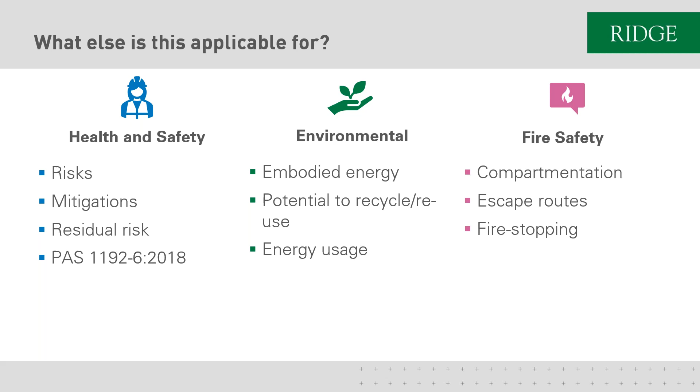And we're going to be talking about fire safety, and chiefly among that is fire stopping in this presentation. So a bit of an overview. The stuff running down the left-hand side of the screen are things that don't happen within Solibri and are probably prerequisites to what you'd want from the process. A good EIR is paramount. The EIR is a resource that says what information is required for somebody to do their job.

Most commonly these come from a client, but it definitely doesn't have to be from a client. When we're working on a project where we've got no involvement other than this fire stopping check, we have a list of things that we need from the models, and that's included within our exchange information requirements. We need to move away from unstructured data. Things like specifications, documents, anything in a long PDF might have some great content in there, but it's really difficult to check that and to actually use it.

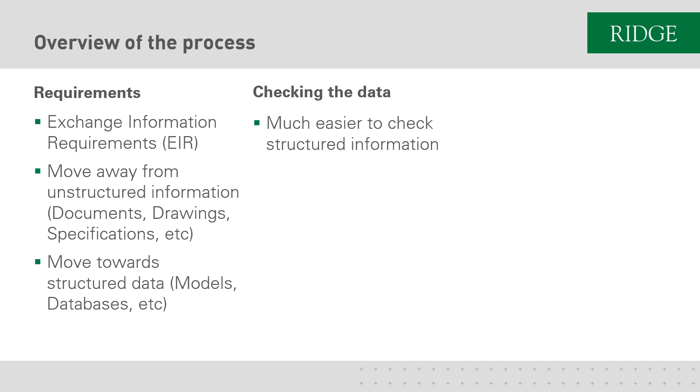I think as an industry, we're very focused on structuring information how we, the author, want to produce it, rather than thinking about how the end user can use it, and even how a machine can interpret it as well to actually use some of the data. And within Solibri, we're essentially checking this data through the rules that I'll talk about, and then Simon will give a live demo with. And we also look at it visually through classifications, and a key one for clients is these takeoffs, where you can schedule out all of the fire stops within the model for other purposes.

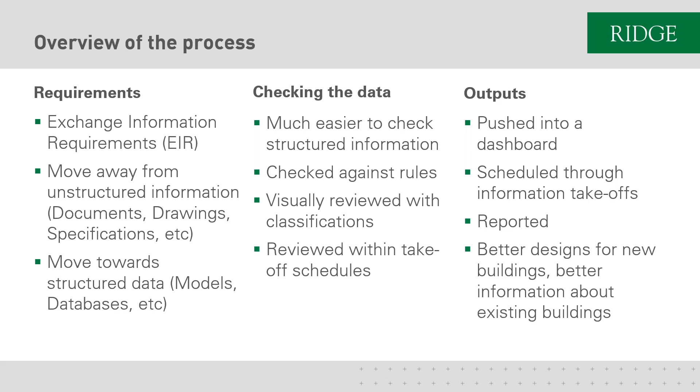And then we can produce outputs through dashboards and reports, and these are key to affect decision making of what needs to change. We can do everything on the right hand side with Solibri. So let's talk about fire stopping a little bit.

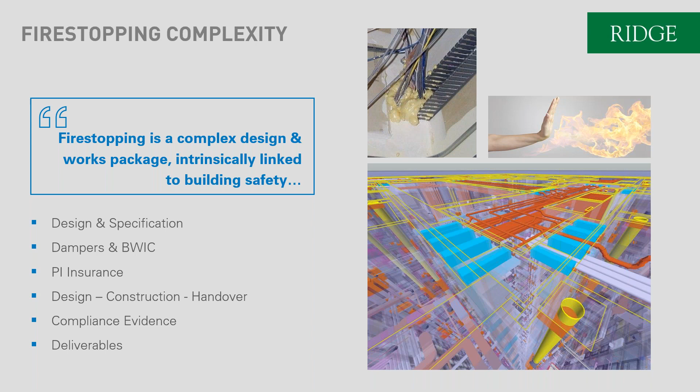It's typically something which is in a scope gap on a lot of projects. It's a hot potato that nobody wants to touch, and it's something that we see, BIM or not, doesn't happen particularly well through the design, let alone when it gets to site and the rest of the lark. So that's the key reason of why we do these checks within there. That's that scope gap. So going to go through a bit of terminology.

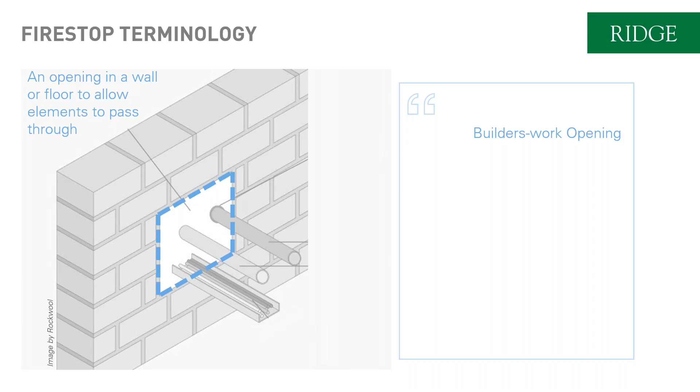And then within it, we can put a fire stop, so this can fill the whole opening, or it might be sleeved around the individual elements, or sprayed, or there's other ways of doing it. But it's basically a product that you'd put in there to stop the spread from one room to another, hence the name fire stop. As a wall will be made to a particular minute fire rating, and then somebody might go punch a hole through that wall to fit their service in. So product needs to go around it, otherwise it can cause issues.

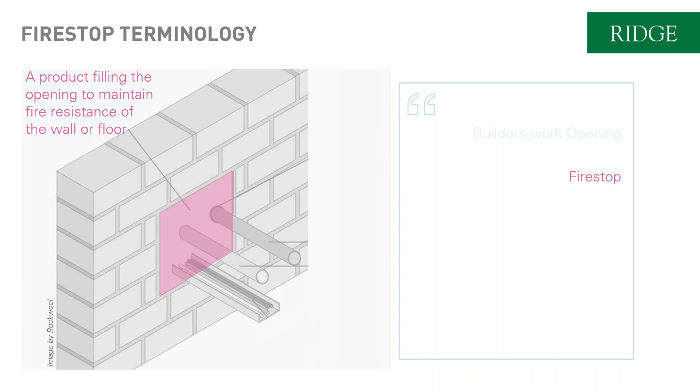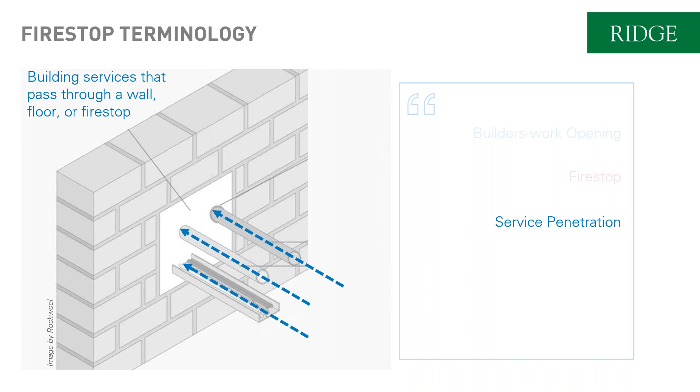When we talk about service penetration, these are just things going through the opening or the fire stop. So we've got some cable trays and some pipes there, could also be ducts and other things. And then service spacing is the distance between the pipes or the services, and then the aperture spacing is the distance between the service and the edge of the opening.

So, digital approach. We don't really see this as a one-time search. It's not like, oh, get the models, identify all the issues, it's all fixed. It's an iterative process, much like coordination checks are anyway. It's kind of a broadening of the definition to include fire stopping within that. So it'd be about checking, providing feedback, seeing that some of the issues are mitigated within the models, repeating it, checking on site, all of this sort of stuff is important. It's not a push button thing that solves things.

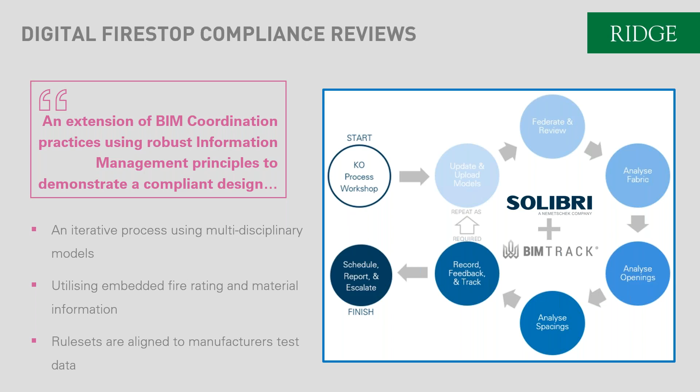And we're using Solibri to do these checks, and BIMtrack, although you could use a different BCF platform than BIMtrack, but I think Solibri is key in that. Who's this relevant for? I'm tight on time, so I'm going to summarize this slide and say everyone. As a contractor or a designer, it's going to mitigate risk by doing it properly. And as an occupant, we all benefit from safer buildings for obvious reasons.

What data is needed? So the prerequisites to what might be required within your information model before you can do the checks that Simon will show. So we need all elements to be assigned an IFC class, and this just means that when you click on something within a model, it's going to know whether it's a door or a window or a pipe or a cable tray, and IFC is the standard and schema that we'd use to do that.

And most importantly, in IFC, you've got different enumerations, so that instead of it just being a cable carrier, you can tell it whether it's a piece of trunking, or it's the cable tray, or it's a cable ladder, as some different manufacturer specifications do deal with those differently.

We also need material data, so whether it's a copper pipe, a plastic pipe, or a steel pipe will change how the rules should work and how manufacturers need the services spaced. We need fire rating information within the walls and floors and doors as well. And the key one here is that a lot of the time this data exists already, it's just not within the structure that we need it to be.

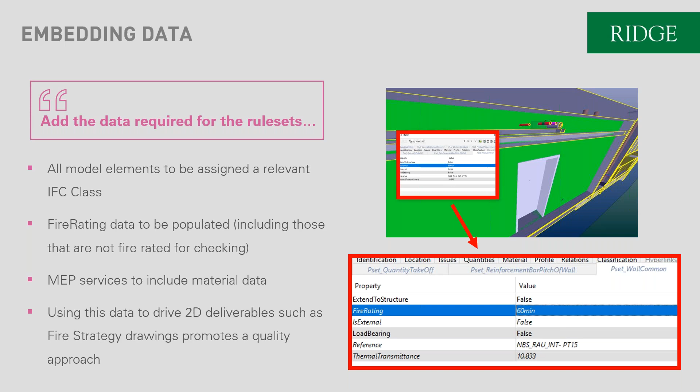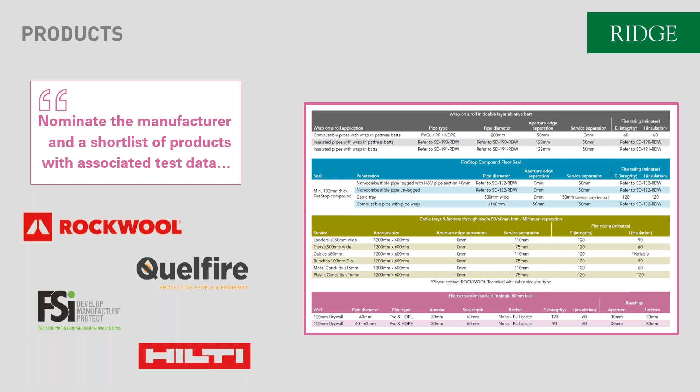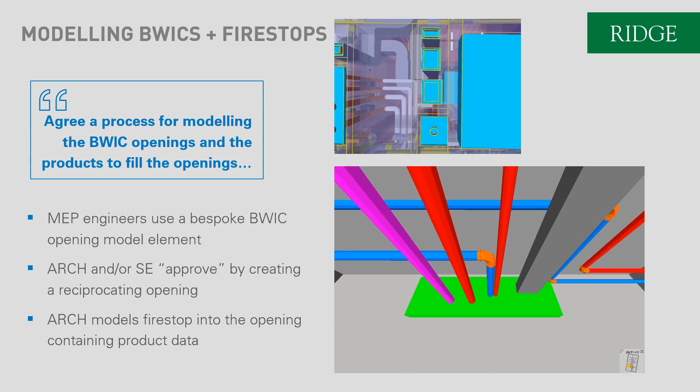We need builders works and Firestops modeled. We've been doing it with these really basic boxes. You could go more detailed, but even just this box will give you a whole range of different checking options. You can do it without the box that you've got here in green and those teal ones on the top, but really you're just limited to service spacings within fire rated walls and floors. You're not looking at distances between apertures and controlling the size of openings. So you do need those modeled in, but we see those quite typically on projects anyway.

They could be put into the COBie spreadsheet, they could be put on a maintenance list, although they don't degrade over time as much as some other products, although everything does degrade over time. It's more about checking things to make sure that no changes have been made, no contractor's been there and destroyed some good design work. They're definitely things that need to be on a robust maintenance schedule.

And linking to some of the things that David said, if you have a list of fire stops in there, you can use that as a pro forma all the way through to check that it's been installed properly, to then photograph that on an iPad to see if it's the same as in the design model, to then maintenance, even taking a picture of that every year. It might be overkill for some of them, but there's nothing more important than checking this sort of stuff. Those sort of outputs. And that's the end of my presentation.

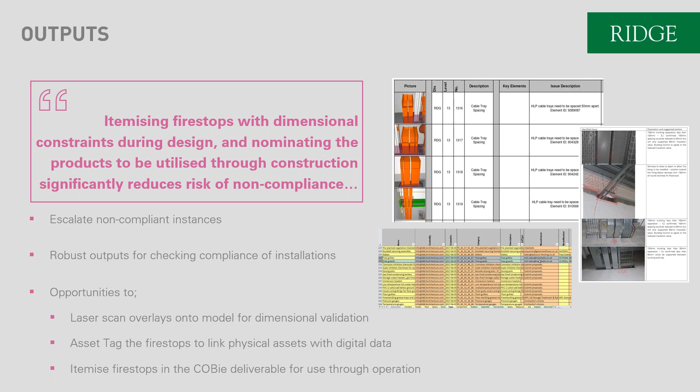I'll hand you over to Simon. Thanks, Alex, and apologies for not giving you a proper introduction there. So this is a BIM manager at Ridge and Partners, one of our customers, and has done a couple of presentations for us before. And actually what he hasn't told you there is that the work they were doing with the fire stopping, they've actually won a number of awards for.

So it came to our attention, just the work they were doing with fire stopping, and that leads us into the next presentation from Simon, where we've tried to take some of the work they've done and automate it a little bit more.

Just before we move to Simon, now I know how to use the polls. I will share them and run the second poll. So first of all, just sharing the first question we asked: at what stage of the project do you do your fire safety coordination and check? So that's just showing you the results from that.

Okay, and then if I just move to the next poll, who checks the digital model within your organization for compliance? I'll just launch that one. And if you can answer that, we'll then move on to the final presentation, which will actually be a live demonstration. So just let that run a little bit longer.

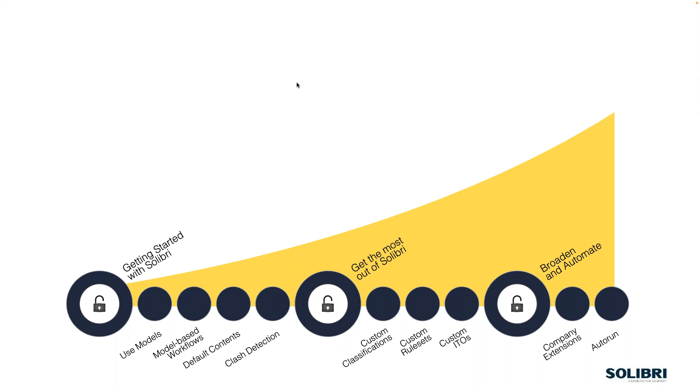Users then can move into improving that functionality even further with creating ways to deploy those new rule sets, and also to automate the whole process of running those at any part of the day really. Now, what we have done is we've created a software development platform, and this is really key to the development that we're talking about today. It provides us with an application programming interface, which enables us to create new rule templates within Solibri. So use the wealth of over 20 years of functionality within the software and give us the ability to build on that and generate our own rules, which are more specific for the industry rather than more generic out of the box. So that's what we're currently looking at here, a very specific use of the technology.

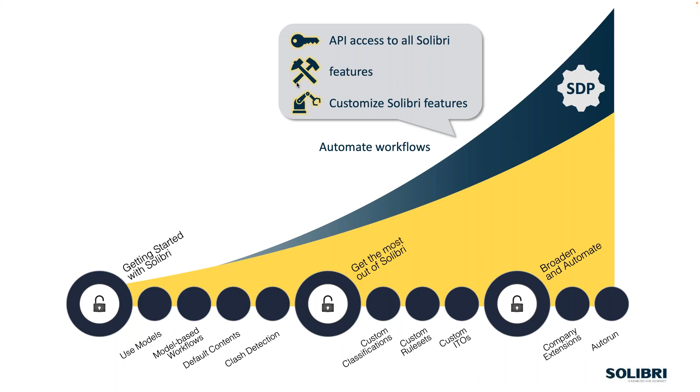So we started off with looking at the fire stopping guidance for the Association for Specialist Fire Protection. And what we're looking at is golden rule 3, which is all about the identification of service intersections with compartmentation walls and floors and what their key spatial requirements are for those services. And Alex gave you a few really nice images from Rockwool which give you the kind of dimensions and those types of things that are actually required within the model itself.

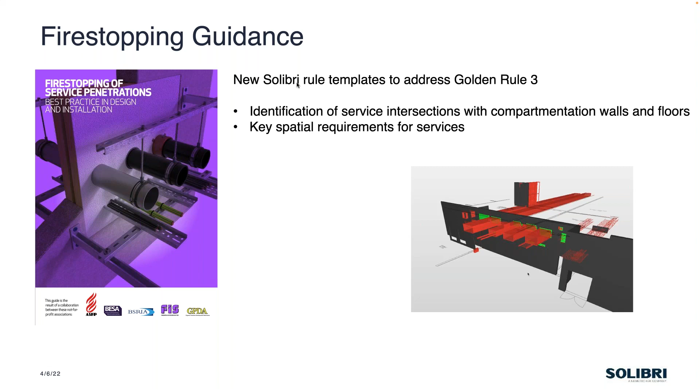So this is what we've done to date, and once we're happy with this data and it's at a point where it's robust and it's been tested fully, which has been happening as we move along with this development, then this will be released to our user base.

So the first part is we have a fire stopping identity rule, and the identity rule enables us to identify all the service penetrations going through any compartmentation walls or floors. Now, we've done quite a lot of work here where objects may be present, panelized systems where voids are not present. So basically, we will find the intersections between physical components like walls and services. We'll also find the intersections between voids, say openings, and where those voids aren't present, so it isn't a physical clash, it will still find that data.

And then what we can do with this fire stopping identity rule is check how many of those services have been addressed by a BWIC or a fire seal component, and we'll have a look at that in a second. Then we have the fire stopping distance rule, and the distance rule is really all about checking the physical dimensions related to the fire seal or the BWIC in this case here, so it can actually start off with the BWIC if you want to.

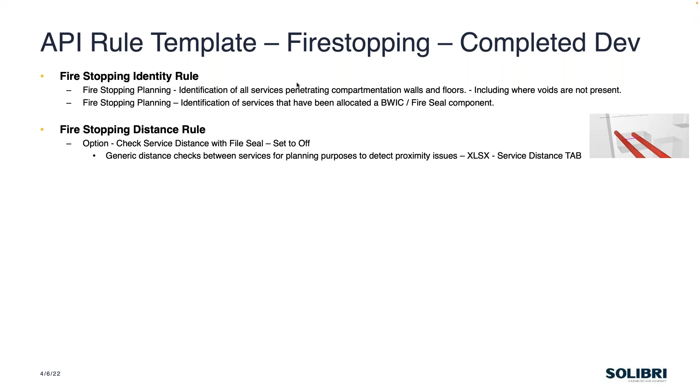But we have a setting in this rule, which is basically if we set it to off, then we can do some very early generic distance checks between services. It's driven by an Excel spreadsheet in the background, and that gives us the ability to give you some rules of thumb checks between those services to highlight problems that you might have before you get into planning of those items.

Then when we turn the option on within the same rule, we can then check the distances between those fire seals or the BWICs themselves. And again, that's driven by a fire seal distance tab. And you can see the image there is pointing out the distances between them. We can also then check between the fire seal edges and the surfaces to make sure they're meeting their requirements for those services and the instance of the fire seal itself.

We can check the allowed services within certain types of fire seals, so that we're not putting services in there that shouldn't be placed in those particular fire seals. And we can also make sure that we've not got any partial penetrations of those fire seals, so making sure that the services fully penetrate right through the middle of those components. And then we can check the services distance within the fire seal against the same service or different services. And again, we've got a tab in the spreadsheet that will do that as well.

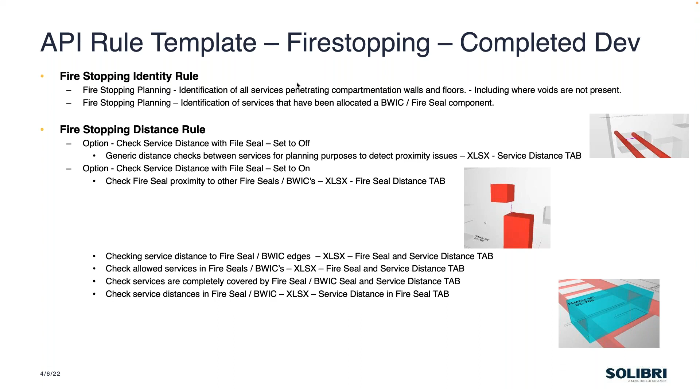On top of that, we have another rule which checks the dimensions of those fire seals in relationship to information that you might get from a manufacturer, just checking that the actual dimensions of them are compliant, and also that we're checking for the positions of those within the walls. We're checking here for things like drop head details, where certain instances of these seals can't be placed in certain conditions, and proximity to the edge of the walls, things like that, which we can actually configure as well. So quite a lot of work has gone on there in order to achieve those goals.

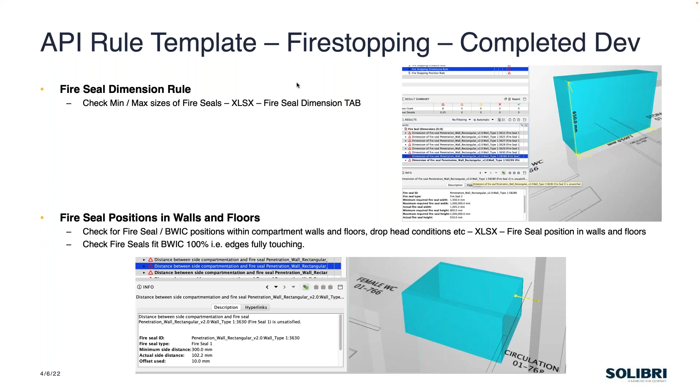We then can check within the same rule here that the fire seal fits the BWIC completely 100%, i.e. that there's no gaps between the builder's work hole and the actual fire seal itself. And you can see with all our reports there in the description part within the dialog box, we give good quality descriptions as far as why it's unsatisfied or failing and what the actual requirements would be as far as those distances.

We've got some remaining development here to do, which we're currently working on. We've got the service distance measurement adjustment, because we should be measuring between any fire stopping products, not just the services. So if we have sleeves that go around uPVC pipes, then it needs to measure to the seal dimensions. And also the accessibility of those.

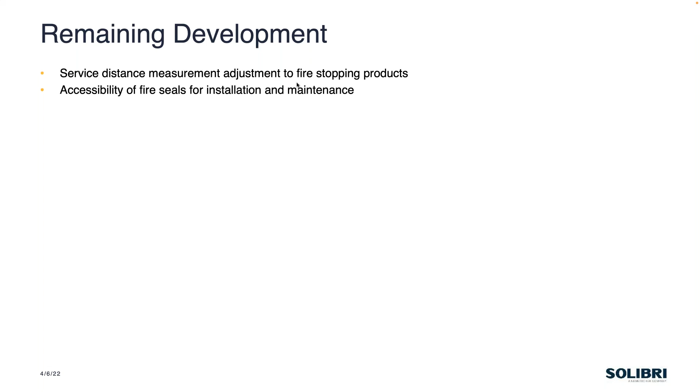So not only checking the locality of those BWICs or the fire seals within the wall itself, but also making sure that we can physically install those and maintain them correctly as the building matures.

We've also then checked the supporting construction, checking whether the installation is single or double-sided, and then comparing the manufacturer's requirements of that fire seal against the wall data or the supporting wall or floor construction. That involves the thicknesses of the floors, the type of construction, the acoustic rating, the fire rating, all those kind of properties required from it.

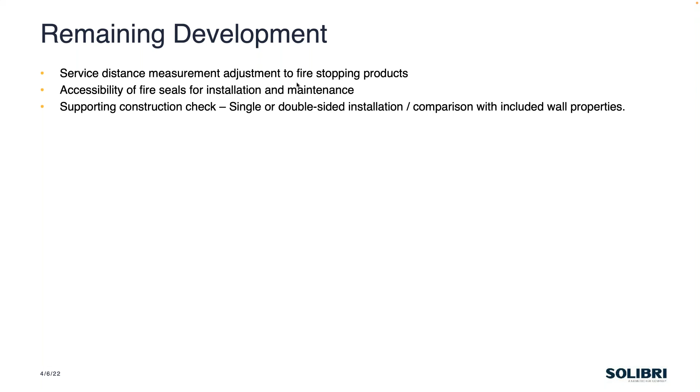We've had requirements already from customers that are looking at net gross areas for the materials for these services, as far as installation and optimization of materiality.

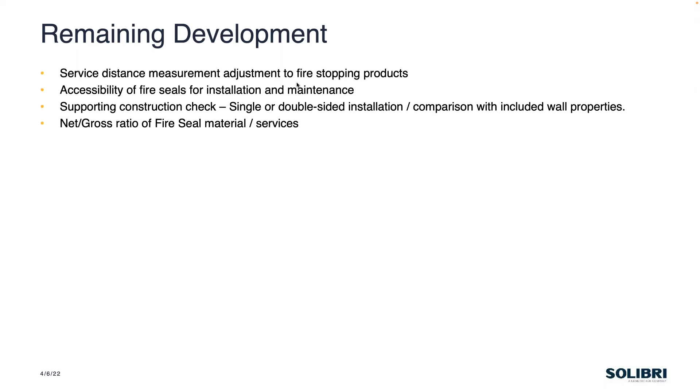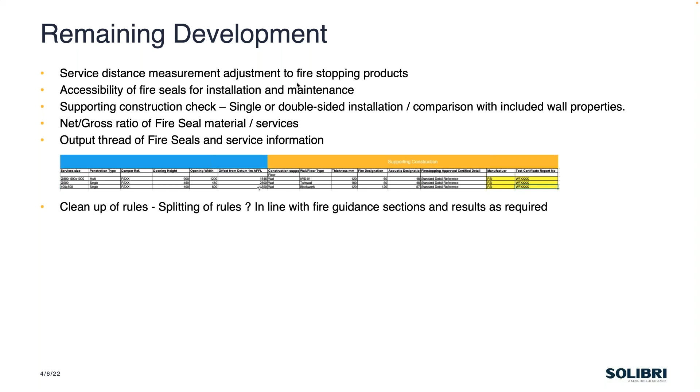And then finally, once we've done that, we will collect all this information and create an output thread for the fire seals and service information to help with that golden thread information within the model. And then we may do some cleaning up of the rules and how they're aligned and how it generates the data in the background once we're happy with the way they're all working.

So basically what we'll do is move over to the demonstration now. We'll come out of PowerPoint and go over to Solibri.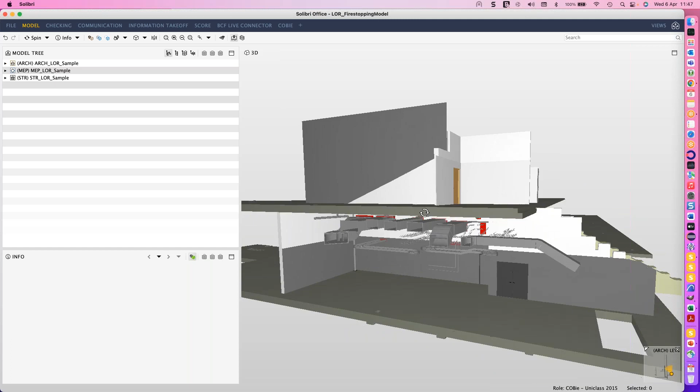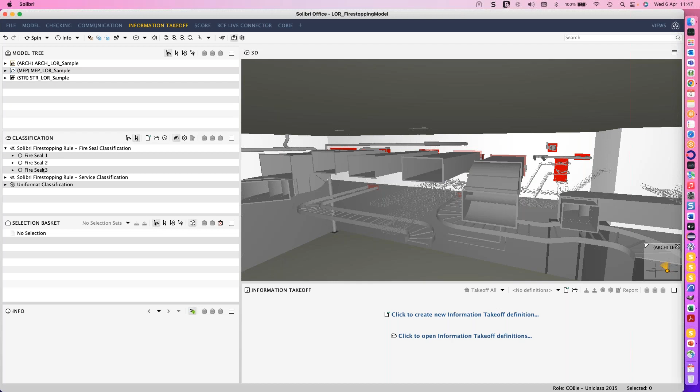So what we're looking at here is just a very simple model, which has a number of services in it. I'd like to point out that we have a couple of classifications. Solibri uses classifications to group elements, and to color code elements to create baskets of data. So in this case here, we wouldn't necessarily call these fire seals.

What we actually have is the seals in the model. They might be the IDs of the standard details from people like Rockwool or Hilti or anybody else, and that would give us an identification for the type of seal, not the instance, because that would be the ID.

And then we would have a grouping of different services. Again, it wouldn't be this low level—it would be broken down to maybe small, medium and large pipes, or UPVC pipes, copper pipes. It could be right down to the granularity of the exact sizes that might be needed to test against these seal conditions.

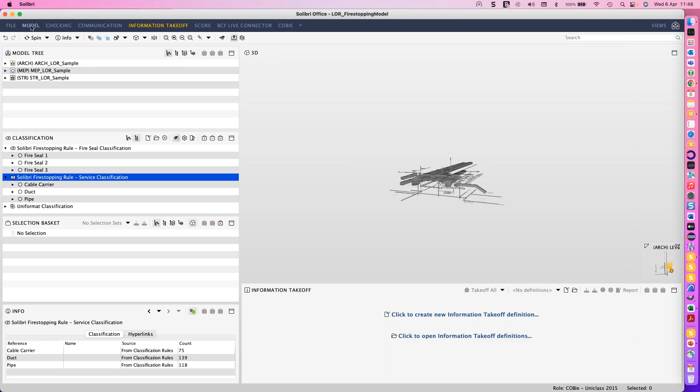So the idea here is that we're grouping and analyzing that data in order that we can drive it into the rules that we've currently got. Now, when we move over to the checking area here, we've got these rules that I've just gone through in the presentation. If we hit the check model button here, it runs through those checks.

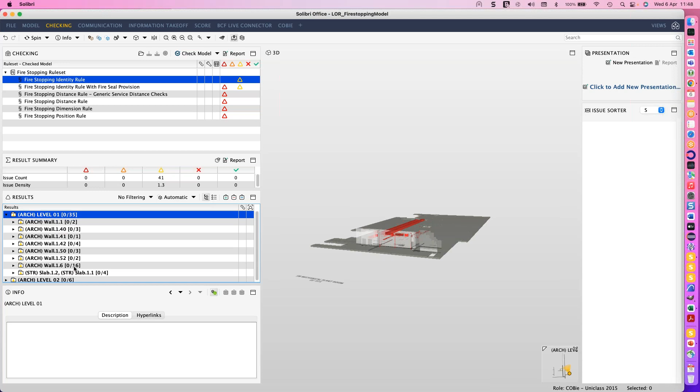The first thing is that, like we specified in the presentation, we check the fire stopping identity rule. Now, the identity rule here breaks down the number of walls where we have services going through those compartmentation walls. In this case, we'd have to identify which are compartmentation walls first, and floors, but each one is then treated.

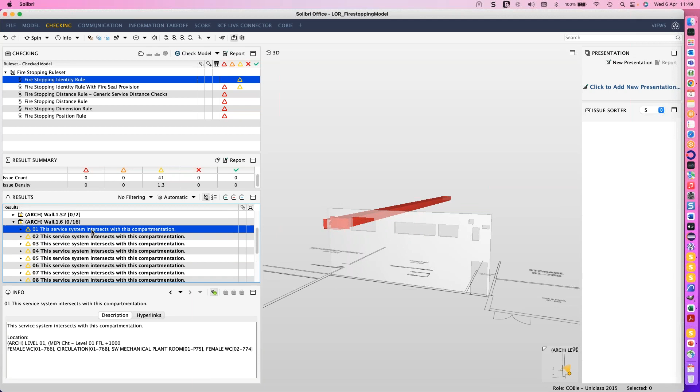In this case, if we open up this wall 1.6 here, you'll see on the screen that we can see the number—we've got 16 penetrations through these, which are the services. And we can see as we go through these that it's actually listing them in order, in the position within the wall itself.

So what we wanted to be able to do here is use this as an identification tool, but also it might mean that you're selecting these, and we're not selecting them from top to bottom—we're doing it based upon order. So you can then start planning your BWICs and allocating the movement or progression of what we need to do for these particular services.

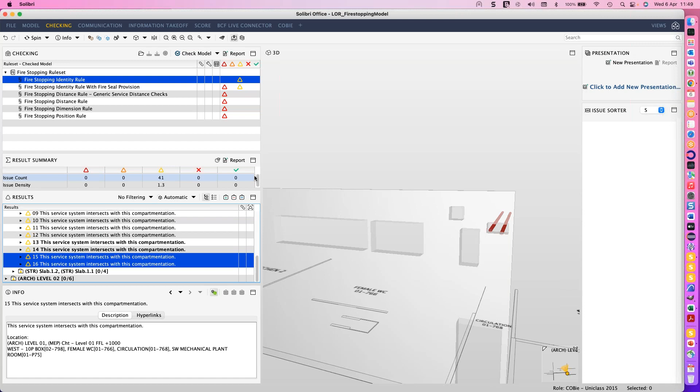Now, once we've done that and allocated BWICs to them, or started creating fire seal elements, we can also run a version of the rule which will then check the same set of data. But in this case here, you can see our 16 here, and in our 16 you can also see these light blue objects, which are our fire seal objects, or our BWICs, if you want to classify them as those.

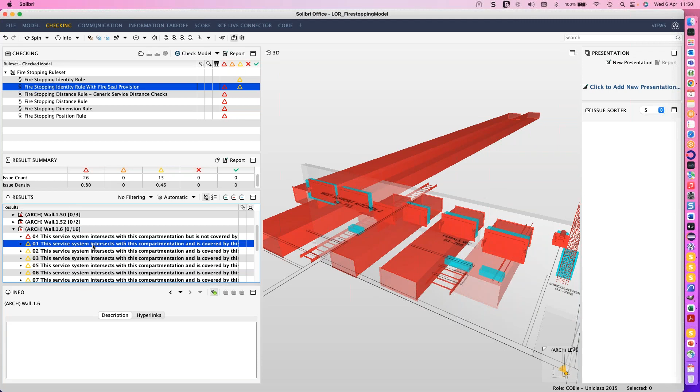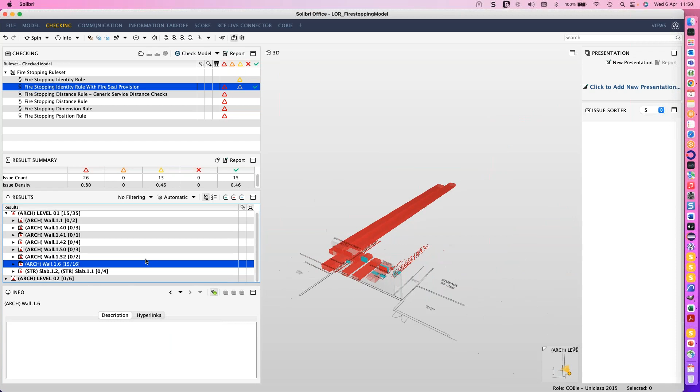What this is showing us is that for each of these, there's a fire seal component around it. You could actually classify these as BWICs at an earlier stage. At this point here, it's saying this component doesn't actually have a fire seal allocated, so it needs to be addressed, while these others could be accepted.

This is really just to ensure that all the time these are run, there's no additional services that haven't been addressed at any point in the project. I'd expect these to be run on a regular basis across the project, and then we can move into the fire stopping distance rule.

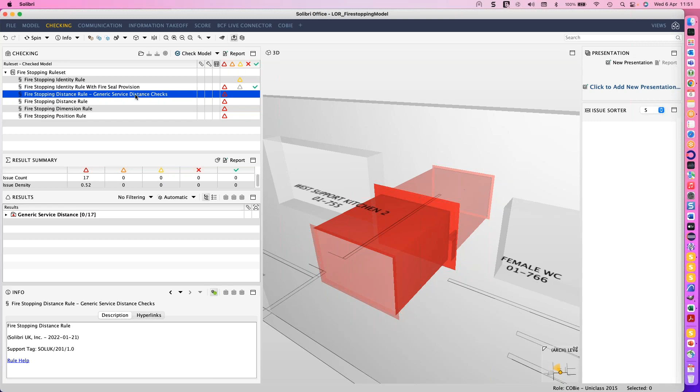Now these two rules here are the same rule, the identity rule - they don't use anything to do with the spreadsheet. The next rules are driven by the spreadsheet for the data. So for the fire stopping distance rule, when we have the option turned off, so we're not using any of the fire seal data, it uses a spreadsheet in the background, and you can see the number of tabs we've got down the bottom here.

What we're looking at here is a service distance check. We're listing the service types that come from the classification you just saw, and then saying what the distance is between the same service and a different service. This is more a case of doing a very outline quick check as far as the distances between those elements, and that drives the rule.

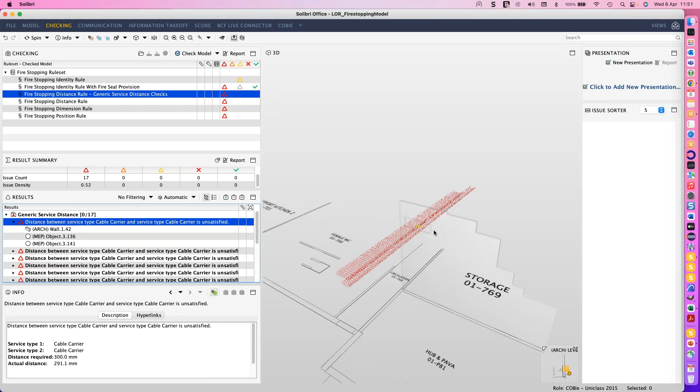This gives us the ability to dictate and find those distances between different services, measuring whether or not we would have a problem. You can see we've got 291 millimeters between these, and it will go through each of those different services to find what the distances are, so we can start tracking whether there would be a problem. Again, a very rudimentary outline rule.

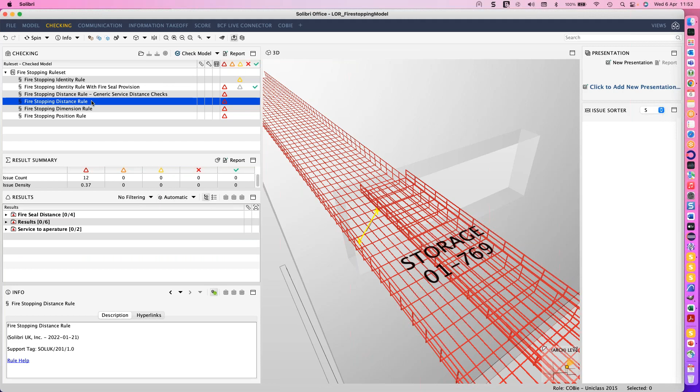But when we turn the options on to deal with the fire seals, we can use the other tabs here. We can look at the fire seal distances, and again we can have the IDs of the standard details here for the different fire seals, and then specify the distance between those fire seals.

We've also added a category function, which means you can name your results how you want to see them - that's the idea behind having the category. You could have manufacturer approved, or in this case I'm just calling it fire seal distance. We also have the fire seal and service distances.

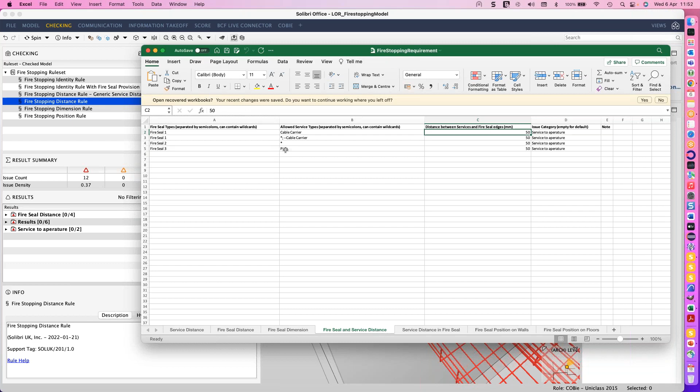This is saying that between these different types of standard details, these are the allowed services that are in here, and this is the distance to the edges of the fire seal. You can also state the type of services allowed - so for fire seal 3 as an example, we were only allowing pipes through that one fire seal, and we're calling this a service-to-aperture check.

And then we've got the service distance within the fire seal. Here we can put the source service type and the target service type, and then put the distances between them, giving us the fire seal service-to-service check.

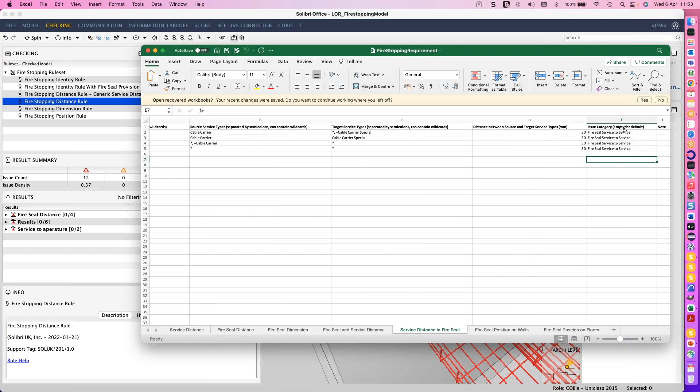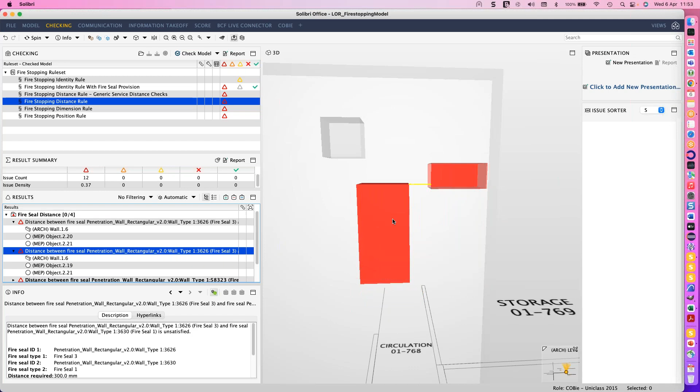So what that's doing in the background is the fire seal distance check - checking off that second tab, now checking the distances between the actual fire seals themselves. This would also work if these fire seals were defined as BWICs, depending what stage you're at in the project, whether the component's actually placed in. Again, we're just measuring between these components.

You can also see that where we have incorrect services - we said only pipes were allowed within this particular fire seal - it highlights it to us and tells us that these services are not allowed in this fire seal, which was fire seal 3 in this case.

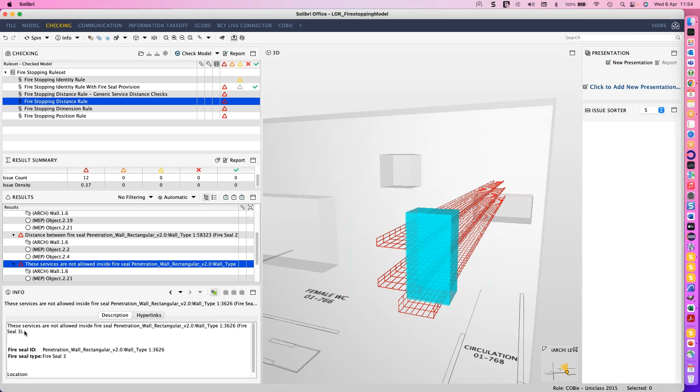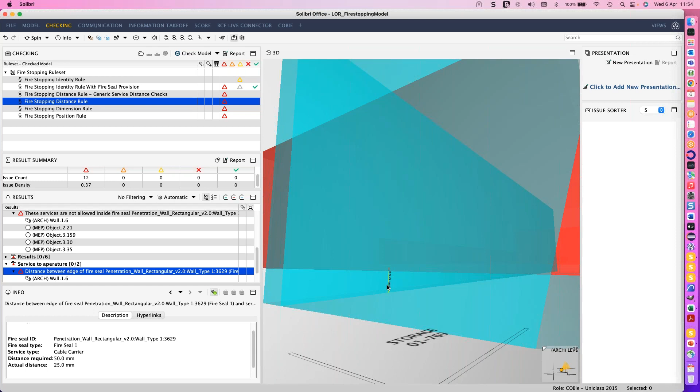On top of that, we've got our distances to the apertures, and you can see here where we're requiring a certain distance—in this case, these cable carriers and cable trays, we've got 25 mil here. The results in the description give us good quality results. This is telling us the ID of the seal, so we'll give you the ability to put an ID in for each seal—this is the manufacturer's standard detail or the type of fire seal. Then we're saying this cable carrier requires 50 mil, but we've actually only got 25 here, and the same goes for this instance of it.

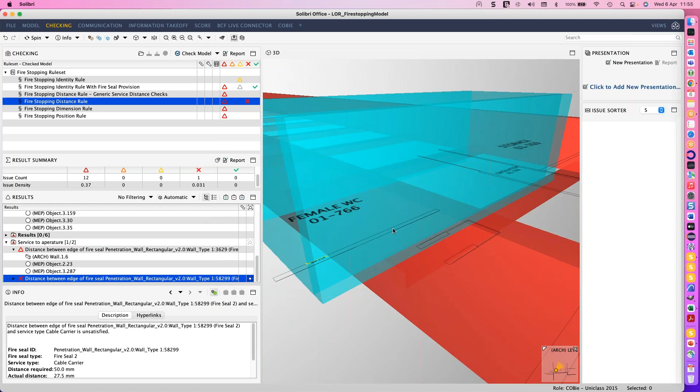So when we're creating our issues and want to generate any data from that, all we have to do is create the slide, and it pushes the data into this—all the information on the fact it's not satisfied, and what sizes we've got, into the actual data we need for the issue itself. Again, this one's at 27.5 in this case.

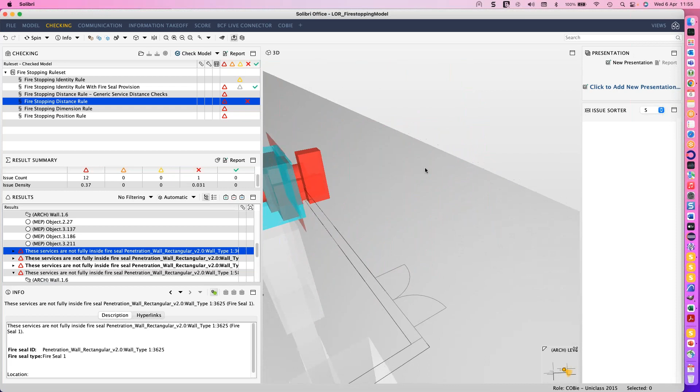We also can check that they are completely contained within the actual structure—you can see here these are all fire dampers that are slightly off because they've got the flange on the outside of the wall. We're just checking to see whether they're completely covered by the blue object, which is the fire seal. You can see in this case it's slightly bigger and sitting on the outside, and we've got this control mechanism that's there.

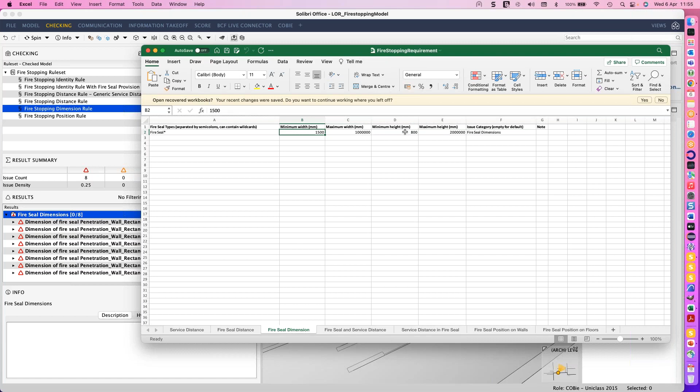So the idea is that we've got these rules that enable us to check all those distances. We've also got the fire stopping dimension rule, which we discussed, where now we can put in the requirements for the dimensions. This is based on the fire seal dimensions, where we can put in minimum and maximum widths and minimum and maximum heights for each fire seal type. What that does is highlight where we have an issue where it doesn't conform to what the manufacturers would suggest for that type of fire seal, just to make sure we're not spanning too great a distance.

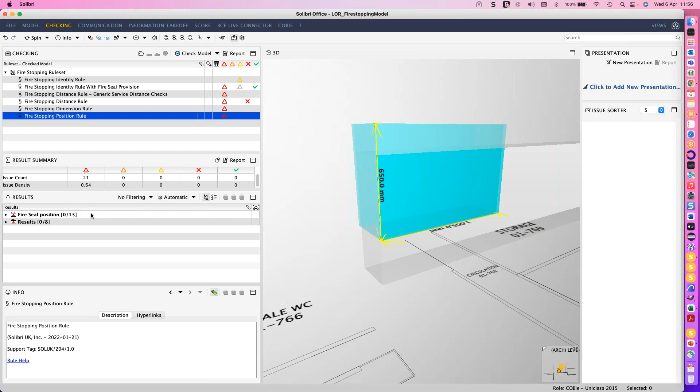And then finally, to finish this off, we've also got the fire stopping position rule. This isn't the one we talked about from an installation and access point of view—this is what the regulatory requirements actually are for these fire seals within the wall or floor itself. So we're checking the positions of them within the wall. In this case, if we're saying there's got to be 300 millimeters between the edge of the fire seal and any intermediary walls, we can see it's failed because we've got 81 mil between those.

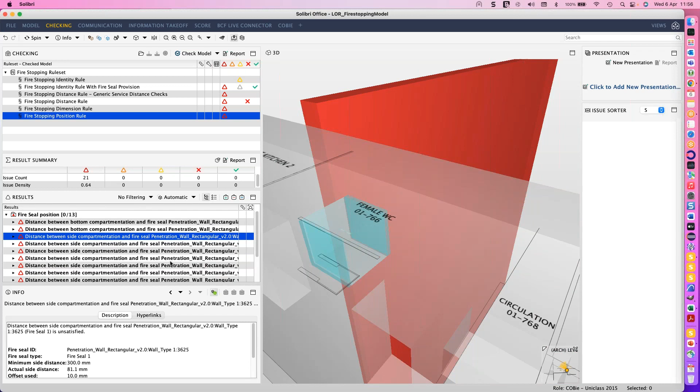Again, if we go down to this one here, you can see even to the edges of the walls, it's tracking that. So we can also add a head distance to that. If we go to this one, positioning walls, you can see we can set up our side conditions with an offset, so we can check whether there's any components away from the wall, which also might cause a problem.

The top compartmentation—so if we're checking for drop head details, we can do that. We're also setting a maximum value there and checking on offsets. We can also define which components are allowed within that area or not, within the rule itself—and again, within the bottom compartmentation as well. We can then label that however we want for those fire seal positions.

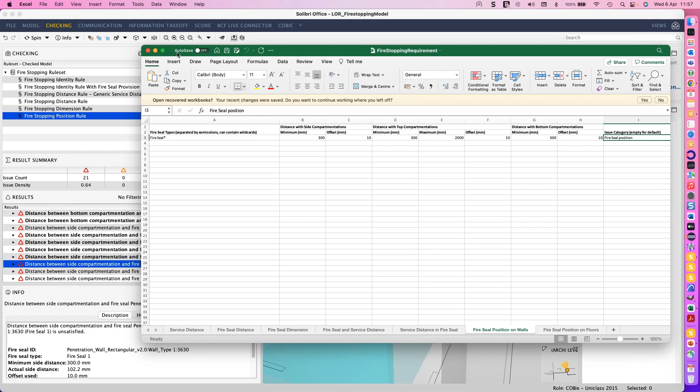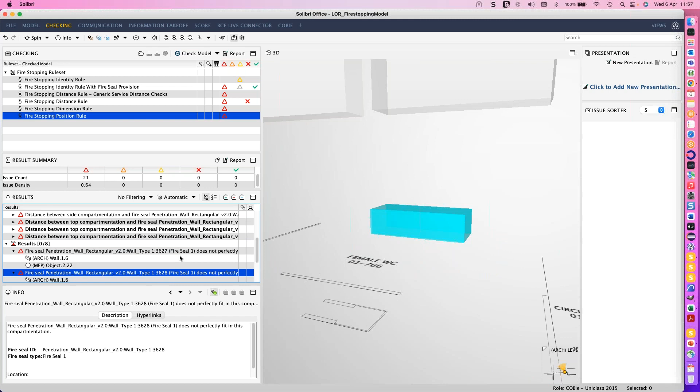So that's checking those. And finally, we are making sure that any fire seal that's there is actually touching the builder's work hole perfectly. In this case, you can see there's a physical overlap here, but if there's a millimeter gap, it would still fail. This one doesn't have a builder's work hole around it—these are fire seals without builder's work holes. This one's sitting within it, but we're checking that the actual edges fit perfectly between the fire seals and the apertures that have been created.

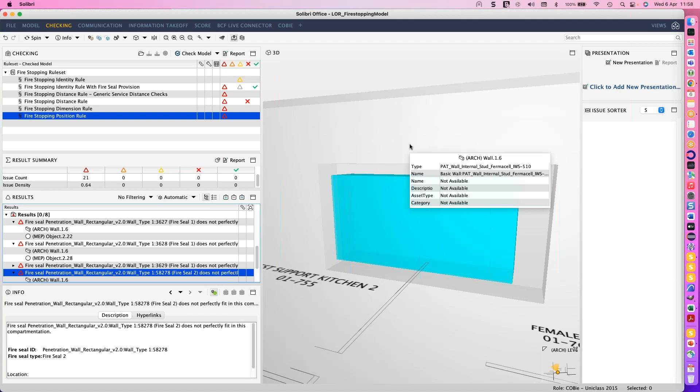And then we'll continue working on those other rules as far as checking the fire seals against the actual supporting construction, and then doing the reports as we said.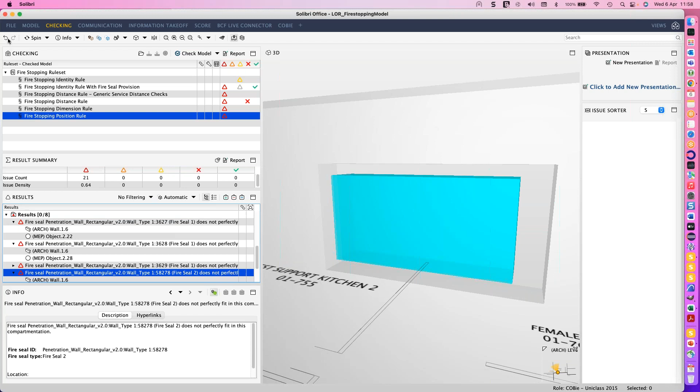Thanks, Simon. No problems with the live demo, which is always good. Okay, there are a few questions coming through.

Okay, thanks. A few comments from Adrian Schilder, I guess. It's important to note that the golden thread should be based on providing information as part of compliance with a host of other standards and regulations, and the golden thread is not one single isolated thing. Yes, of course, Adrian, completely agree with that. And I think obviously David touched on some of the other standards that they're looking at, and we know when we're working through these compliance regulations that there's lots of different standards to take into account.